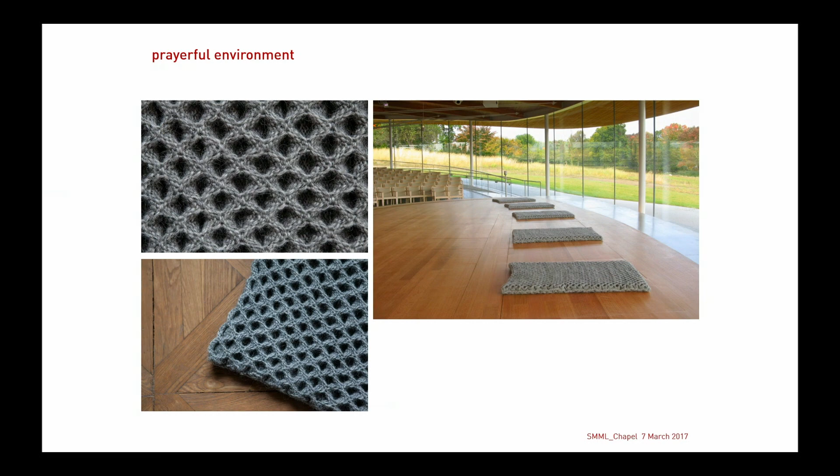The second prompt was about prayerful environment, and we showed some details of some prayer mats that his studio has worked on. We wrote: prayerful environments provide protective spaces that enable individuals to suspend their connection to the stresses, routines, or circumstances of a given moment, and to mentally and emotionally connect to something beyond themselves. There are many physical attributes of constructed environments that provide perceptual experiences that enable this important transition from distraction to prayer.

The third prompt was about healing spaces. And one of the other things that was unique about the RFP was that although the chapel was always at the heart of the project, it really was envisioned as a spiritual center that also included a reflection room, which is what you pass by to get here, and a Muslim prayer space, which we'll talk a bit about as well. All of those spaces were really at the heart of the mission of the hospital, that these were spaces that provided a kind of healing that went beyond what could be provided by medicine alone.

So we wrote: healing spaces provide respite from the challenges of illness and allow individuals to recover optimism in the process of healing. For many, a connection with the sights or sounds of nature provides a space for healing. For others, experiencing beauty and quiet can nurture processes of healing. We propose to establish a protected outdoor landscape space physically connected to the chapel, allowing individuals to move between the two spaces to seek their own personal experience that provides respite and nurtures healing.

And we'll talk a little bit about that garden, which is a future project that will happen outside these windows, hopefully soon. And the last is manipulation of light.

The manipulation of light will serve as the most critical consideration of the project. Our ideas related to natural light, generous and indirect, will drive the geometric development of the new chapel volume and roof structure. The manipulation of natural light will also play an important role in helping differentiate distinct areas of sacred space that comprise the chapel, including the tabernacle or space of ablution. Both material selection and landscape sequence can contribute to these effects and augment larger visual impacts with the subtleties of weather, wind, and other natural phenomena, and the movement of sun, clouds, or the changing colors of the seasons.

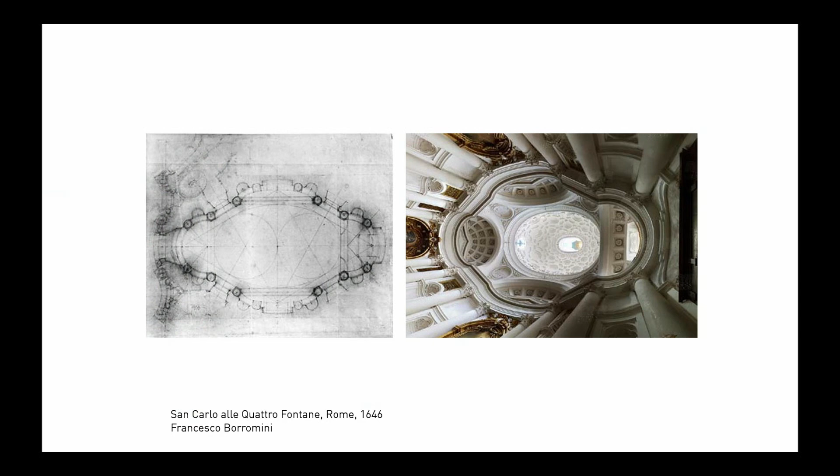So those were the first responses to the prompts before we really delved into the project design in particular. And then, so what we're showing you are actually slides directly from the interview that we had with them, after the first submission of the RFP.

And this was a slide that we showed — I think it's there now — the Borromini's San Carlo alle Quattro Fontane, as well as San Lorenzo in Turin by Guarino Guarini.

And we talked about these as the kind of role that geometry plays in the production of space and the importance of it. And part of what we were talking about too was the role of a particular moment in church architecture of the Baroque, where the architecture was really given the task of trying to produce a sense of awe, a sense of wonder.

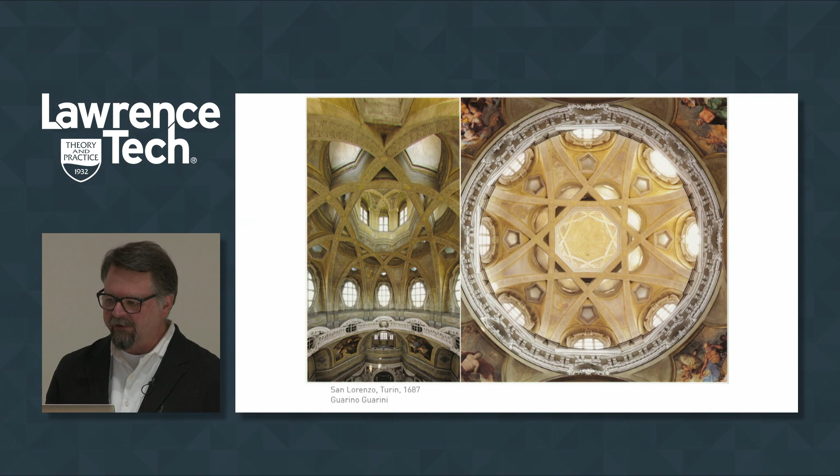And the architects who were working on that did so in pretty remarkable ways through the manipulation of sophisticated geometric systems, but also in ways that rendered things that were heavy as light. And particularly the Guarini that I think you're seeing on the screen right now is a massive dome, but it's rendered in a kind of lattice work that is pretty fascinating to us.

So we're trying to think about how the qualities of light and the shaping of a space articulate the potential of a new kind of volume. And part of this was in response — I think after we're done, we can all walk to the old chapel and you can get a sense of the significance of why we were talking about a spatial volume in relationship to the proposed project.

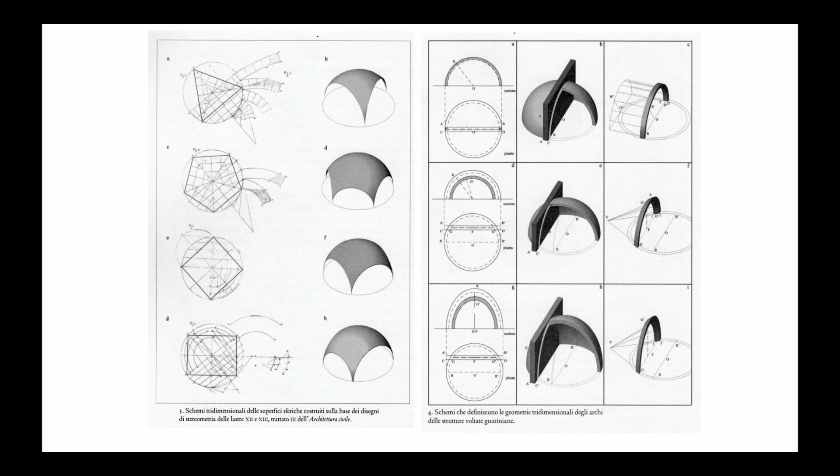I'll also say that at the beginning, the prompt was not necessarily to do a new chapel. The RFP said that the project was open to both renovating the existing chapel or possibly building a new chapel. So we were trying to calibrate our presentation relative to the possibility of renovation rather than just a new chapel.

And the other aspect of the work that we brought to the table when we were invited to interview was some research that we had already been engaged in related to dichroic glass, but in a very different context.

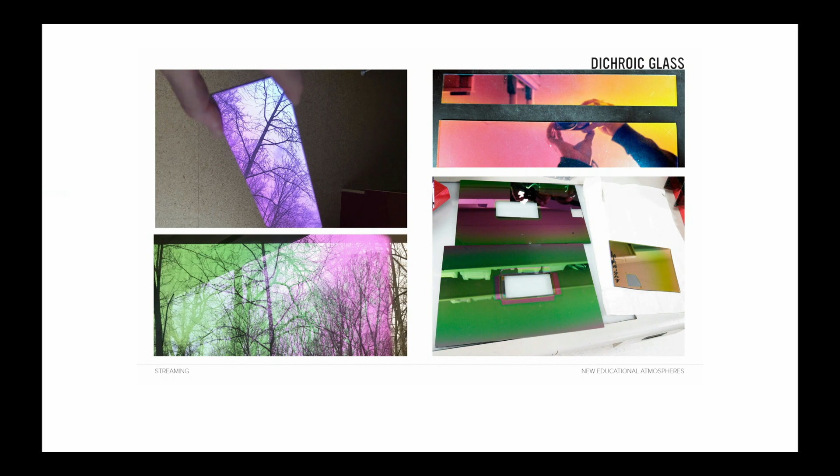So the images that I'll show in a moment are first a photograph from a series of samples that we received. We were working on a grant sponsored by Guardian Glass as part of work we were doing at the University of Michigan. In the process of proposing a project related to glass, we got a tour of their facilities, and the samples you'll see are part of a glass sputter coating process, a little bit different than this glass, which is a laminated glass with a film in it.

But one of the aspects of dichroic glass that we were really interested in was its capacity to be both reflective as well as transmissive for light.

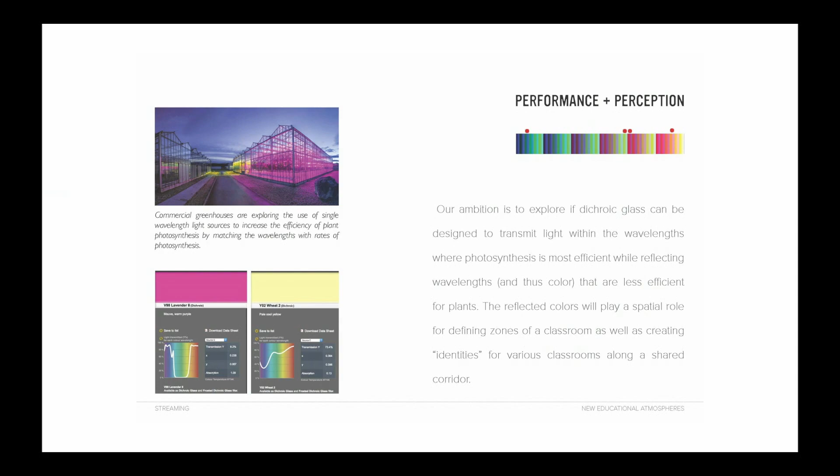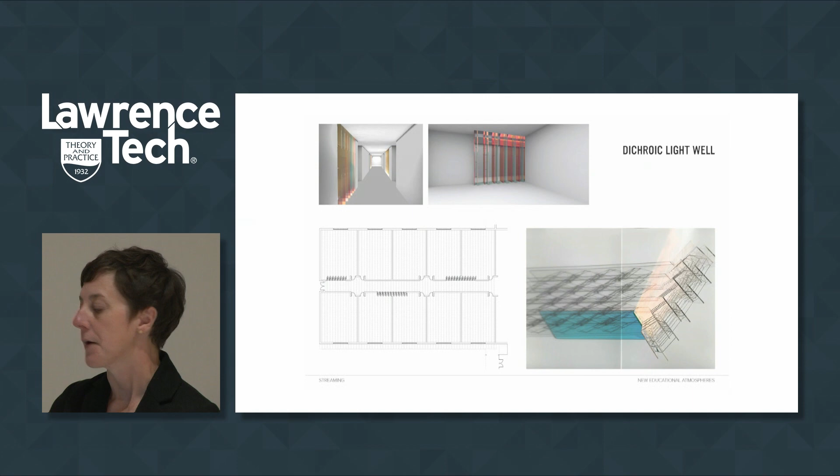In that research project, we looked at this material as a way to produce light well insertions in old elementary and public schools needing renovation, merging STEM education with growing plants through increased light and air ventilation. We learned that plants don't use the full visible spectrum of light, so we developed recipes with Guardian to split the light so some wavelengths transmit to the plants while others reflect into the hallways of the typical double-loaded corridor, managing heat gain and UV effects.

We showed this work and also noted there were exciting possibilities to reinterpret some of the qualities of color and light found in the tradition of stained glass in chapels.

So I'm watching Carl's screen spin.

They pushed us further than we might normally have gone. The first thing they asked us to do, before we even met with them, was to analyze the grounds of the hospital campus, which is enormous, and identify where we thought the chapel should be located.

There's the spot where we are right now, which we weren't really considering as a first approach. There's another spot on the far side of the hospital on Levan, where the old emergency room is, that was a potential location. We also talked about the existing chapel next door as a renovation site.

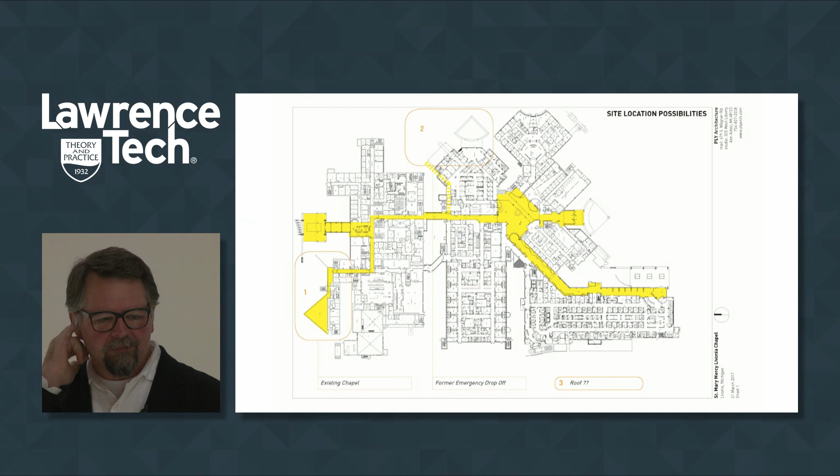That's where this site became the open space option. But there were quite a few utilities in this area which we thought might preclude the budget they had for developing here.

The final location we proposed, which no one remembered until we dug this slide back up—I met with the design team this morning on another room we're working on, and asked if anyone remembered we proposed putting this on the roof.

Steve Van Brussel, head of construction and our main consultant, said 'No, you didn't do that. I'm pretty sure you didn't do that.' But anyway, we actually did think about the roof, which is kind of crazy.

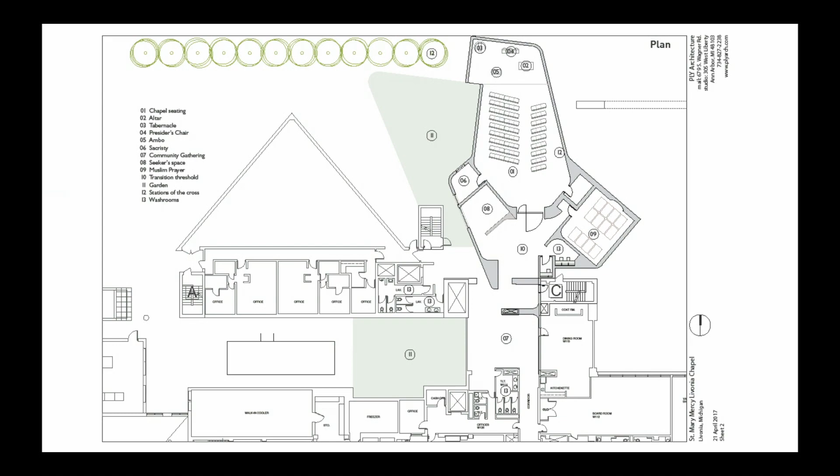So through the process, it looks like the slides are catching up. We did some test fits, which we won't show here, working on the existing chapel as a site and reorganizing it to work with the new program.

The existing chapel is a triangular figure with a bar of rooms on the back, where the priests' apartments are—two apartments where they live. But there was this additional program we were working through.

We tested shifting the volume over and quickly realized there were several advantages, one being a very special cross on the front face of the hospital located up behind and above us right now.

Thinking about the massing in relationship to that part of the hospital not only shortened the circulation sequence—you all walked past the cafeteria on your way here, one less hallway to go down—but it also captured the cross.

So we started talking about developing the massing as a way to borrow the cross and make it part of the chapel massing. That observation really locked in this site as the one to work on.

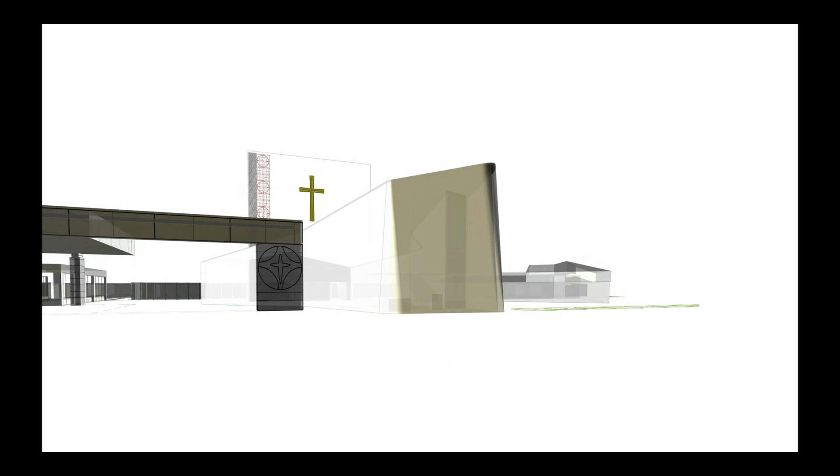As much as we were already interested in certain geometrical operations, we also had to deal with that cross and with the flying buttress of the porte cochere, which is only about 3 years old. When we suggested it might need to go away, we were immediately corrected.

There's a basement under the existing chapel, and the fire stair comes up right in this corner, which pinched us since we couldn't actually close that off.

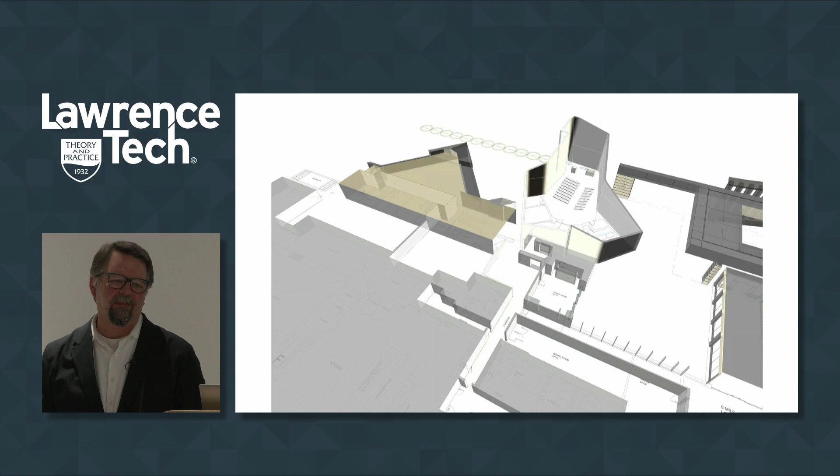We eventually ended up closing it for a short period of time, but it was a negotiation between all of these pieces that are pushing and pulling. Then there's the other geometrical constraint: we're in the grid of Michigan, but Mecca is 53.6 degrees that way, so the Muslim prayer space needed a reorientation and positioning on the site. All of these pieces were pushing and pulling against the geometry of the building, to the point where the shape started to form itself out of those maneuvers.

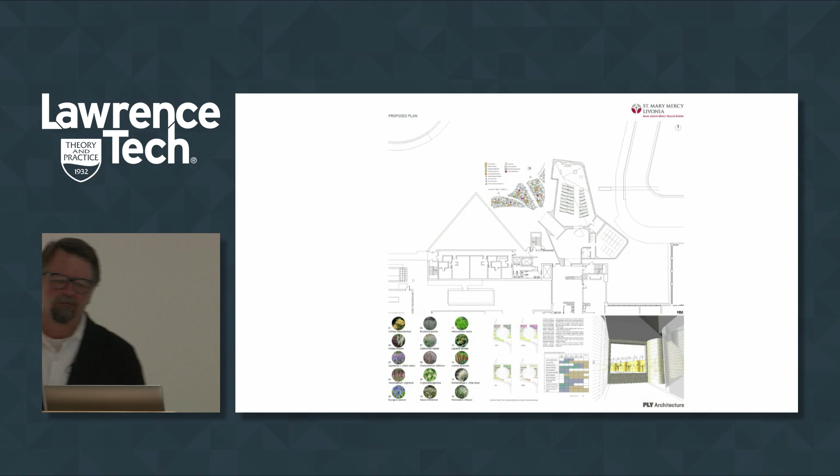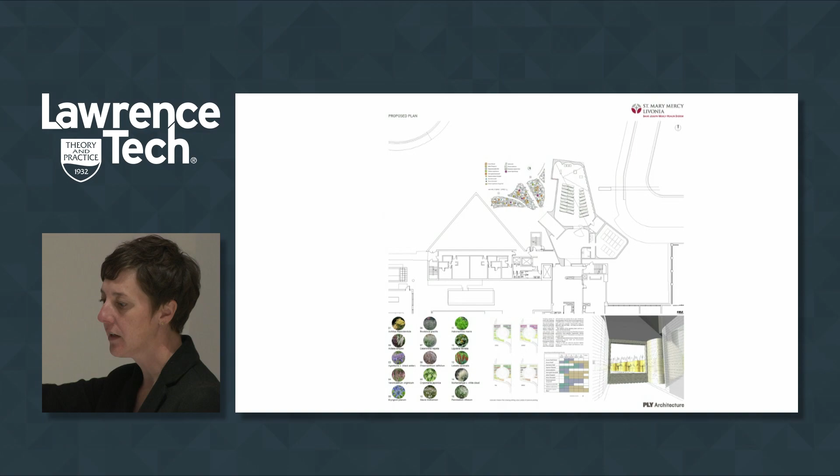The plan you're looking at now shows one of the early pre-schematic package plans, which has the seeker space oriented more to the west, which was to be a healing garden, and the Muslim prayer space down to the southeast, and the chapel very similar actually to where we are now. At that point, we had started to get on the inside.

It was a really rapid process, which was also one of the things that was really significant to the development of the work.

We had weekly meetings with the chapel design team, so every Monday morning we had to show up with the next step of development. There was a lot of pressure to get the project done because Sister Mary Modesta, one of the original nuns and the foundress of this hospital, was still very much involved, and they were originally aiming for a birthday November opening. Even with all of that, the start to end of construction was around 19 months.

This development was happening very quickly, so we were using representations like setting up tones in the digital model, not trying to do too many extra drawings, but just showing them the process work underway with tones and colors that could clarify what we were working on.

Some of the things I think you'll see are familiar. Some of these images show the development. We had three or four iterations of garden walls for the healing garden, all of which is on hold for the moment. But a lot of the qualities of this chapel space were there from the very beginning, even in rough forms, and a lot of it was about refining those as we got more specific about material systems and space constraints.

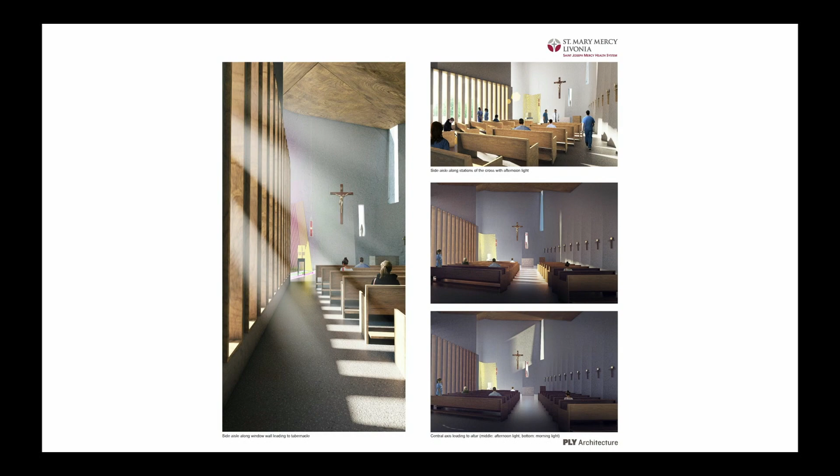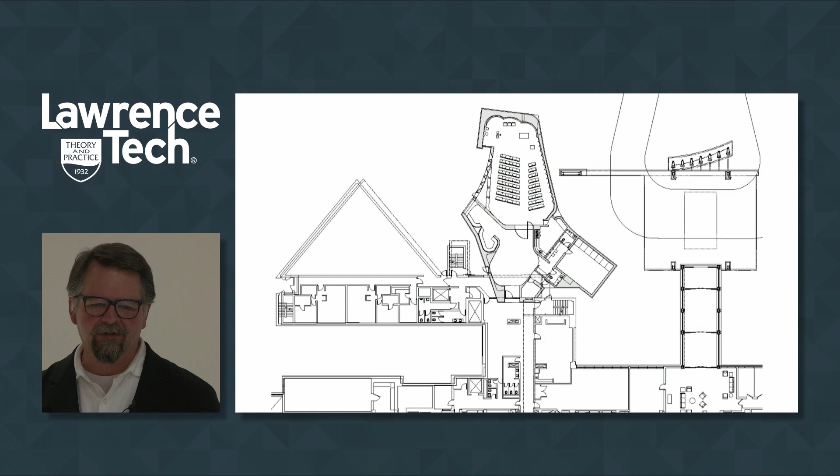The other thing that accelerated the timeline: at the beginning we were meeting every Monday with a full new presentation of the design. It was end of March, April, and we had another major deadline for a project in China that our whole office was consumed with, and our go-to students at school were grinding through their final reviews. So really the first 8 weeks of the project, Jen and I were still teaching full time, but really the only ones working on the project because we couldn't peel anybody else off the other work we'd already committed to. It was a kind of insane moment.

It's also why there's almost no renderings, because we've just never learned to do that. So we were inventing, within the time constraint, ways of presenting the work and showing it. Then we got to the point, right about the end of May, with a fairly fully developed schematic design.

A full package, I think, was about a 120-page submission of the schematic design package that was then handed over to the construction managers who were just hired at that point, and they did their first cost analysis. It was a really interesting process, I'll say.

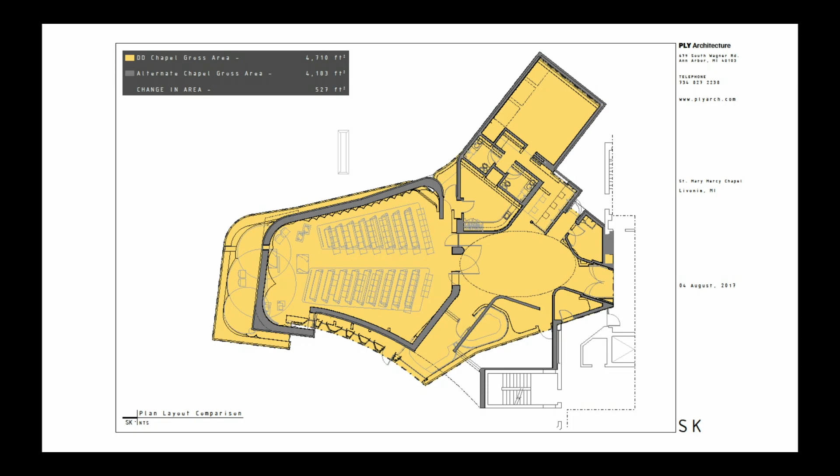They're using a software called CostX, which basically takes your BIM model and imports all the data from it to generate their cost estimate. Of course, we have a Rhino model, not a BIM model, and AutoCAD files, not.

So we did a lot to work through with them because they'd forgotten how to do actual takeoffs. They scanned a PDF of our drawing, dropped it into their software, and began to make a schematic model. They misscaled the drawing they imported to about 30% bigger than it was.

So we got the first numbers back from them, and it was absolutely wild and shocking for everyone. It ended up being over $1,500 a square foot, which, even for what we were drawing and what the hospital was interested in, was a bit radical.

The interesting thing in the process of working with builders is that that first number, no matter how wrong it is, is still there. It's still a kind of number that sticks.

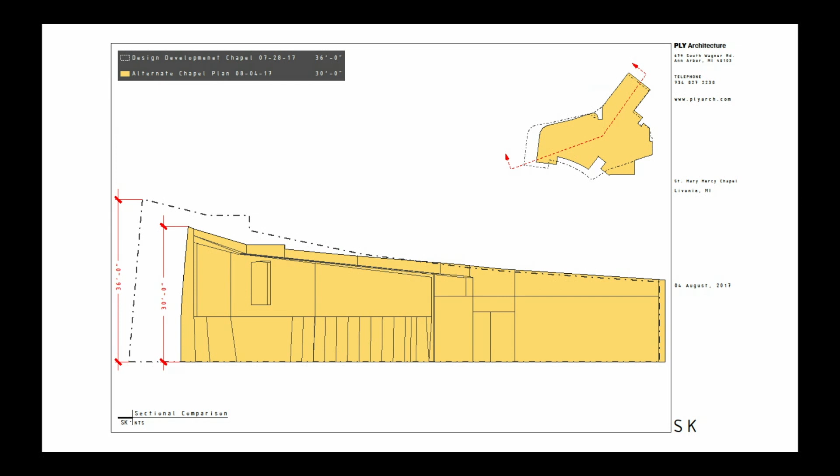As we were scaling back and making corrections and assumptions, you don't ever get all of that money back. So we were in this kind of 6 week period of battling and working to resolve the questions, anxious to move into the next phase where we're working with BIM, but we weren't quite there yet, and the design we had developed probably wasn't the one to learn it on, given the workflow and the accelerated schedule of the project.

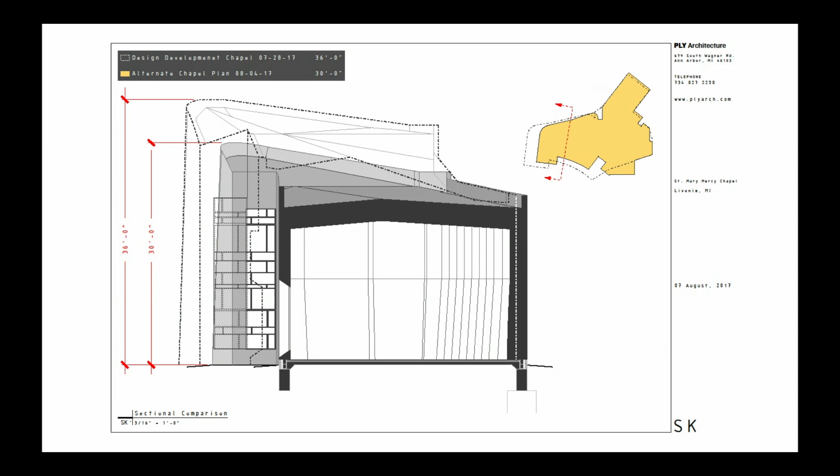So we were working in a pretty intense way back and forth with them. At the point where we got their numbers to the right square footages, we were still far enough over budget. The slides you're looking at now are us taking an old Xerox trick of shrinking and reducing the spaces without changing the overall qualities of spaces, to the point where we're still working to get that budget down.

And the last drawing here, that might be about to show up, is pretty close to the scheme you're seeing now in terms of the general location of pieces.

As part of that, the Muslim prayer space, which was independent and part of the new wing, became a renovated space down along the corridor. It was the nuns' dining room, their private dining room, which they gave over to the space. We designed an ablution space as a kind of entry sequence to set up that room.

And then we reoriented that, wrapping originally with a screen to be fabricated, now a combination of screen and curtain, to reorient the otherwise rectangular room, which is shown in yellow in the drawing you're looking at.

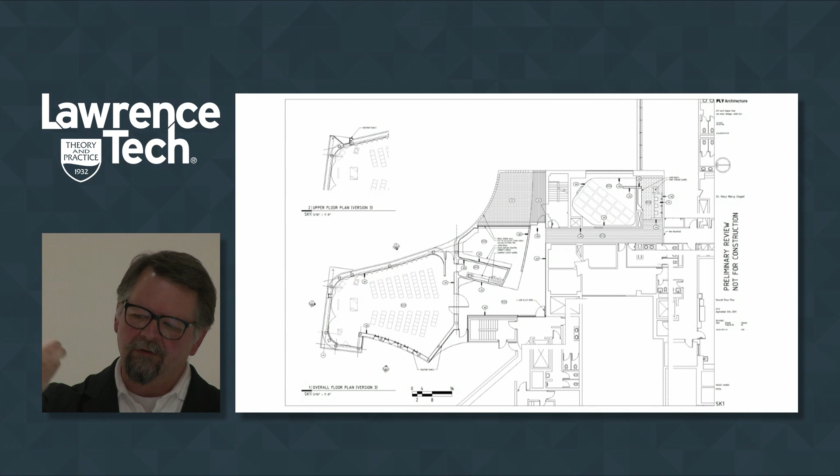And then the other thing that immediately happens when the project goes over budget is they cut the garden. Landscape is like the first number that's attacked. There was a lot of sentiment to maintain that relationship between inside and outside, so it became the courtyard adjacent to the reflection space around the corner.

So we just flipped through a few of the iterations of the plan. The yellow one was leading up to schematic. The black and white was our SD, and now you'll see one that starts to have the tone and recognizable pews that you're all sitting in, and that's the current plan as we have it now.

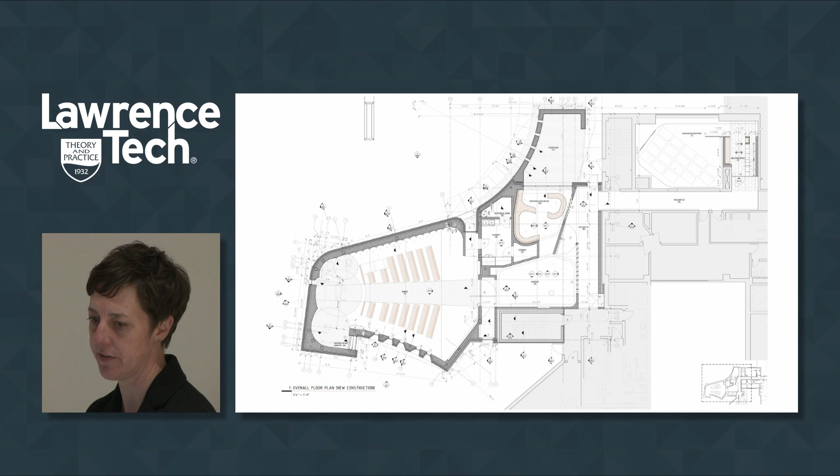The other big part of the development was the corner, the expressive corner of the building and of the chapel. The massing of this project, while the individual rooms were shifting, had always stayed pretty consistent, in the way Craig described as smoothing over disparate uses and trying to make the beacon the singular element out of that.

And so the transition of the corner from square to rounded at the top was there from very early on, although at the point of SD we were still testing out various ideas of what material we might use to actually achieve that.

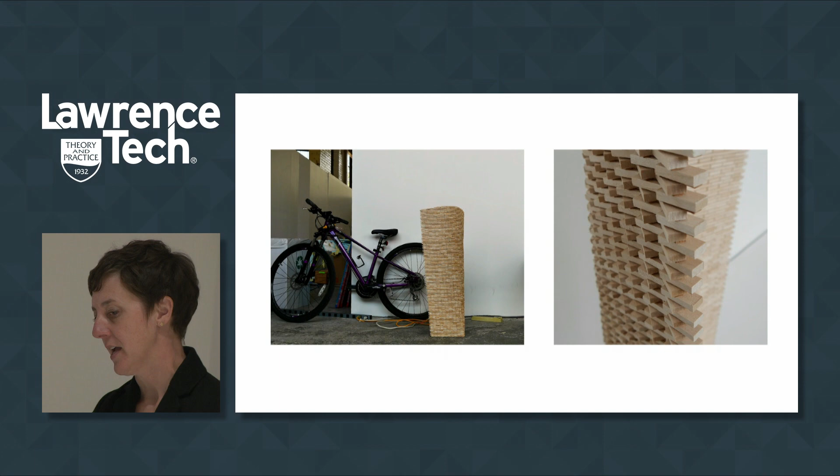Yeah, we did. We're not showing these, but we did a scheme with precast concrete.

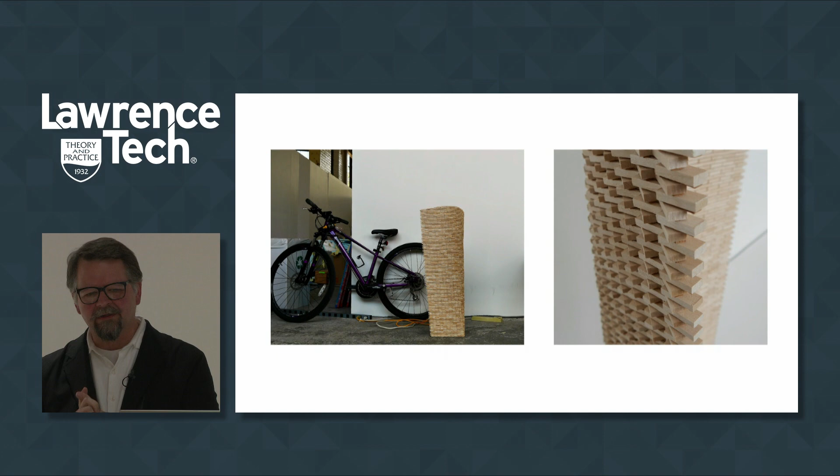It was determined by our construction managers that all of the precast concrete companies were so backed up because of the Little Caesars Arena that we couldn't get on anyone's list, so that went away. We looked at GFRC as a series of cast panels at a different scale than the precast. That kind of got lost along the way somewhere, and then ultimately we settled on brick as a way to begin to work.

A couple of ways we began to work between the digital model and a way of beginning to design the brick and think about the distortions in the geometry, which were there from early on, and were interestingly fought for by the design committee. For them, the curvature of the wall or the curvature of the base of the chapel made it stand apart from the existing rectilinear box of the building.

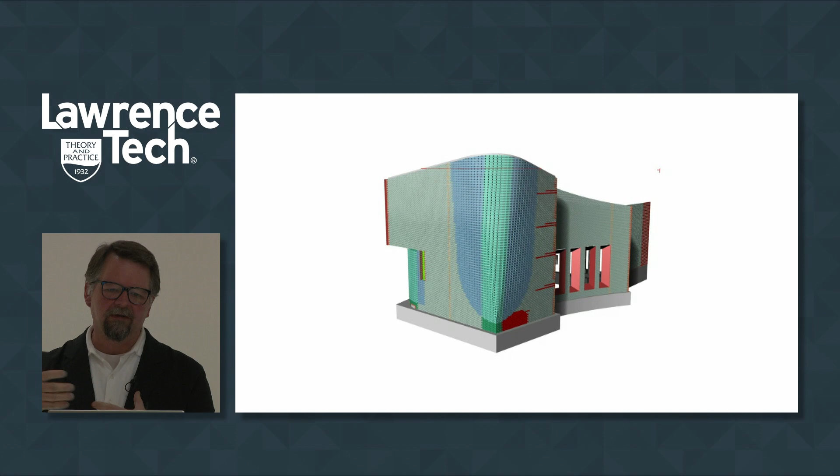They really didn't want this chapel to blend in with the existing building, even though we were trying to work contextually and borrow the cross and develop it. They wanted, and we wanted, it to be a kind of unique figure.

And so the corner, this important corner, is basically that corner. And it's the position of the tabernacle in the plan. And the interesting thing, and we'll talk about this again when discussing the ceiling, is that there's a tension between this space as a church. It's not a church, it's a chapel.

It's designed for people to just come in at any time. There's a mass once a day, at 6 a.m. And the tabernacle, which is where the Eucharist is held, is used throughout the day by lay ministers who are taking the Eucharist to the sick who can't come down to the chapel for Mass.

So for the nuns, that becomes more important than the altar, which is the site of the ritual of the Mass. The tension between these two things sets up an interesting relationship in here. So we wanted that verticality and height to grab there, and it also gave us the opportunity to grab a little piece of southern light by pulling that corner further over to give us the dichroic window.

But developing that corner, and we'll talk about the outside of it, was a tricky process both in the geometry, but also a really incredible and awesome experience of working with a group of unbelievably talented masons who were in it from day one. They saw the design and completely wanted this job. They competitively bid it. It was a pretty great thing to get them on board.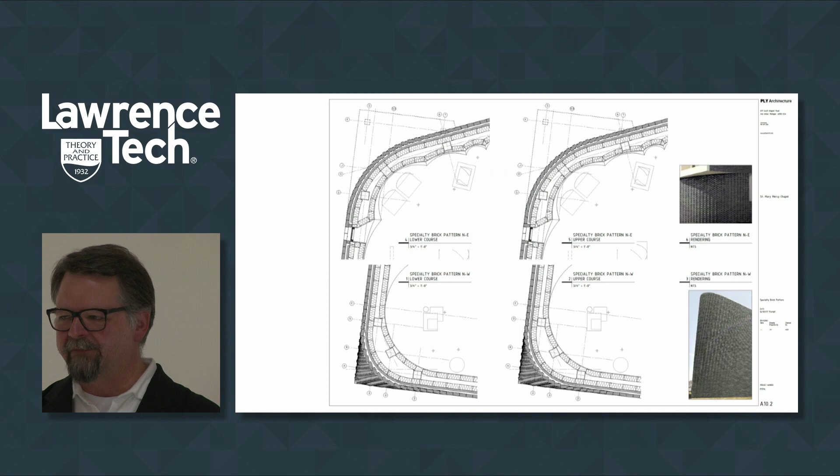It was this great moment where you see the difficulty of what it's going to be, and then you see the moment that's a challenge, and craftsmen taking that on as a way forward.

And so we developed the drawings through a back and forth dialogue with them about what we were after. As we're wrapping the brick around the corner, it's conical, so every course of brick is a different length if you stretch the rows out, because it goes from the right angle to a soft curve at the top. So every single course is different, and it all resolves at a straight line back here and a straight line up at the top of this window.

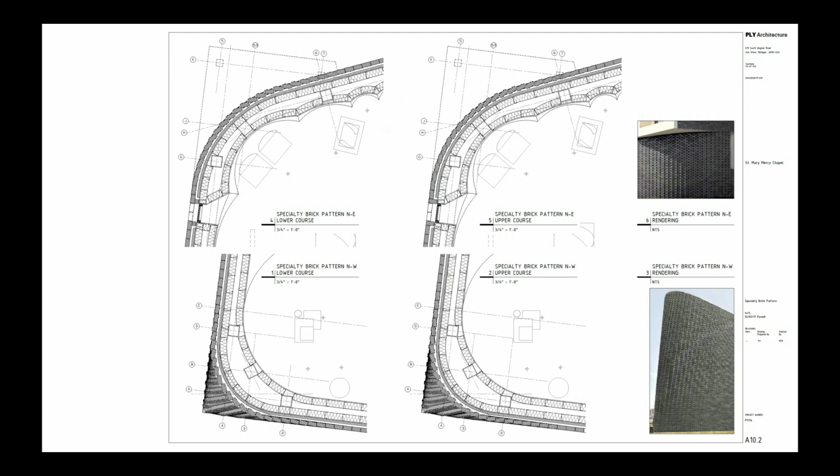And the decision was we don't want to cut any bricks at those moments, because we'll end up with some little slivers or some big fat joints. So there's a whole process we went through with them, both in developing a grasshopper model that populated the wall of brick for us and worked on the angles, and then going in and massaging specific areas where we're expanding the mortar joint a little to nudge it, or tightening the joint a little to shrink it, to get the final resolution point in line.

It was a really remarkable moment because the digital got us to a certain point, but it wouldn't get us to that last hurdle. We had to go back in and begin to develop by hand through the constraints and issues we were putting on it.

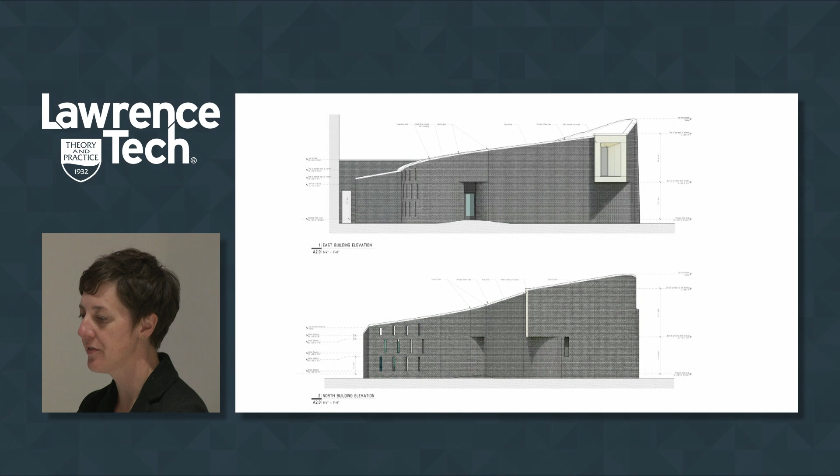The digital corner studies you saw early on, the color coding has to do with that. It has to do with coding the rotation of the bricks, and also coding the different spacing layers of the joints of the brick.

The digital model was one of the things we used to communicate back and forth with Davenport. We shared a model with them, they rebuilt their own digital model and shared it with us, and there was some comparison and overlap to see if everybody was using similar logics to build that corner.

The basic premise we brought to the development of this corner and the patterning of the brick was to simply let the brick happen. So as it turns the corner, we just said we'll delay the rotation of the brick just slightly.

It's starting to pop out a little bit as it goes around the corner in sawtooth. Then in the next course, we'd do that in the opposite direction, so the brick starts to make a kind of brick weave in the pattern, but it's there just as a result of the geometry interacting with the brick itself.

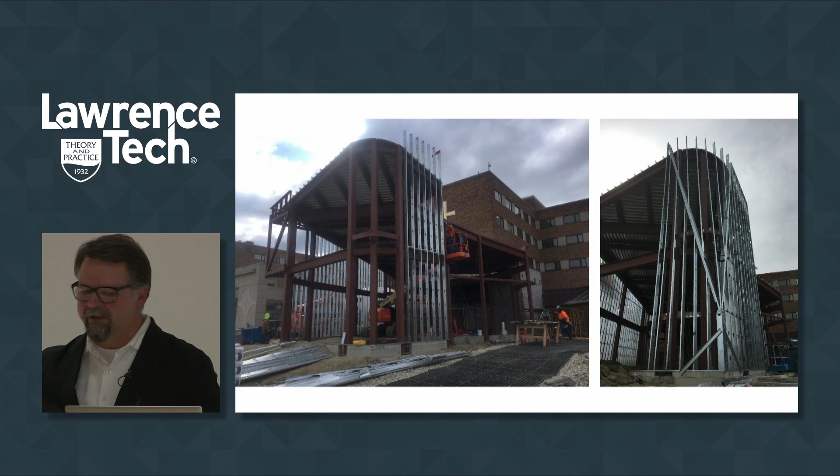That was important for us because we wanted to articulate it as a presence on the facade, given how few windows there are, since it's such an internally oriented space, the hospital chapel as an inside, with only a couple windows looking to the garden, the dichroic window, and a window to the east that in the morning mass brings light down onto the altar. The wall itself needed to have a presence and character that was important.

One of the more challenging aspects of the corner had to do with the framing and structure of the corner, not just the steel structure underneath, but the secondary layer of studs to form the basis from which the masons would work, because there's also a tilt to it. So measuring where you are in space on that corner becomes quite a challenge.

There was also a lot of back and forth in terms of us sharing our models with the structural and steel engineers, and them sharing back. What you'll see in a moment is a layering of those two models together, so we could see overlaps and see where things were or weren't lining up, in order to coordinate that with the models the masons were working on.

There are three drawings in that image. One is the Rhino model of our project. There's a model imported from the steel fabricator, Douglas, who are just outside of Lansing, and then there's a CAD drawing of our wall section, all matching up to make sure there's precision and alignment of all those pieces.

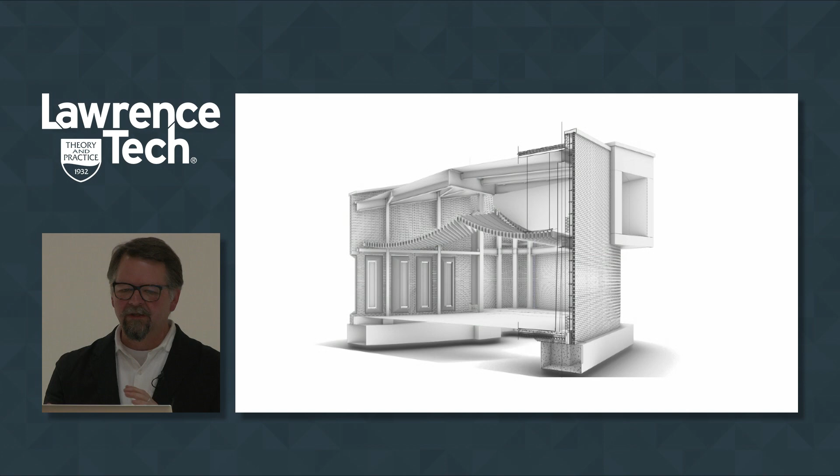The last thing we wanted to do was get that frame up and start bricking, and find that piece of steel is a little bit too far out, and now we've got a whole other thing to worry about. This image is our skin and shell model with the steel model produced by Douglas inserted inside it, so we were looking to begin measuring conflicts within the resolution of these two pieces.

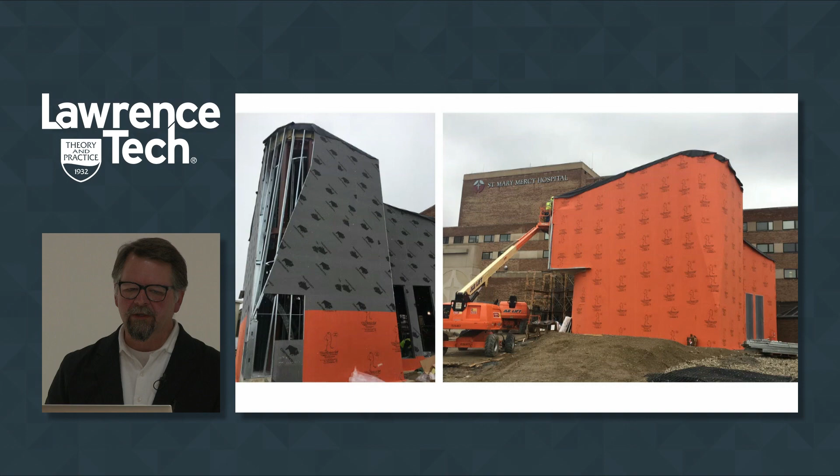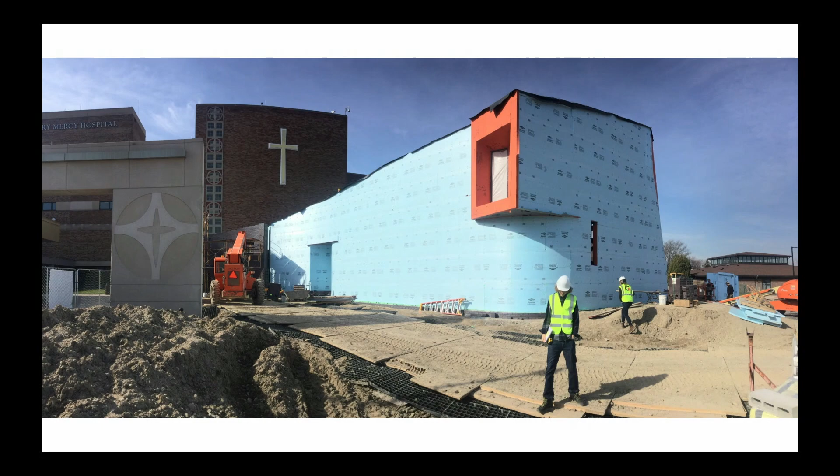Now you're starting to see a sequence of images, which we'll let play a bit. This is the construction of that corner, from the steel frame to the steel studs, which make the larger surface as a ruled surface wrapping that corner, to the waterproofing and sheathing, to the insulation, and then you'll start to see some of the brickwork going into place.

You'll get there in a second. We did a few quickly.

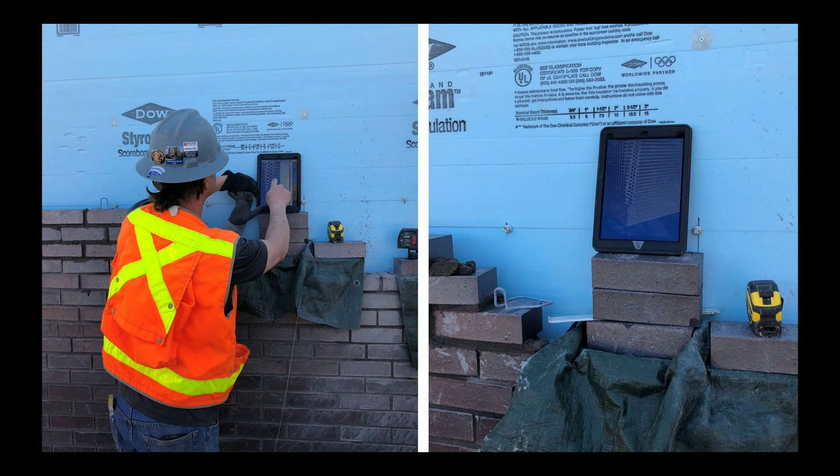The brickwork was another amazing thing about working with Davenport's. We were ready to print full-scale plotted templates of some of the brick coursing, and at one point thought they'd cut plywood molds every fifth or sixth course, then reconcile in between. In the end, Mike felt like they could just do it.

So what he developed was a method of running vertical strings that grab the point of each rotating brick. The masons are still placing by hand, working in a way that's calibrated and careful, but giving themselves a really interesting set of line work that they're beginning to develop.

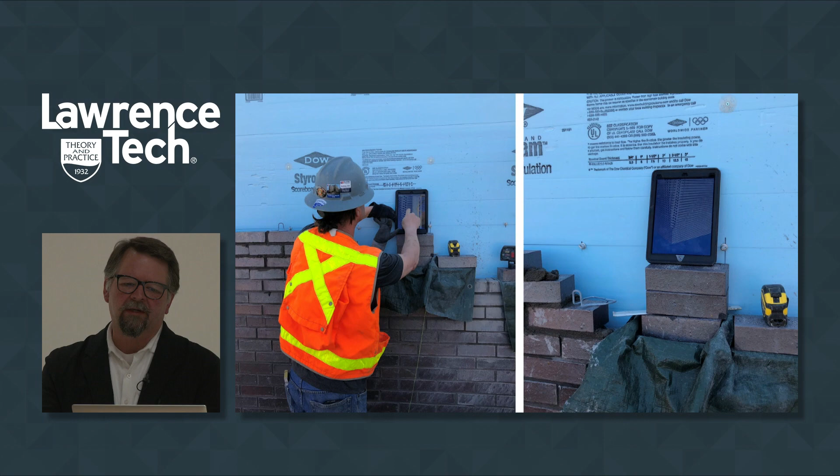When we got to the larger corner, we had a Rhino model we developed that they could import onto their iPads, turning on every layer of coursing. They were basically building the Rhino model one layer at a time as they went up, checking and working on it. You're seeing an image of Mike with the iPad on site.

And then the corner is really interesting. On this part of the building under the window, those vertical strings are simply straight. But when it gets to the conical corner, the joints and points of the brick start wrapping around, so every day he'd reset his strings.

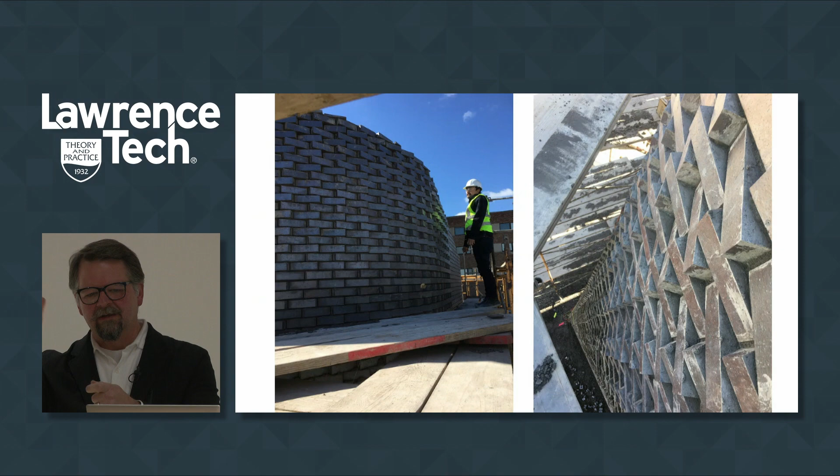Mapping that corner around, they did a pretty amazing job, but the other challenge is that a lot of it comes down to direct visual impact. It was frustrating for both them and us because we couldn't see it during the process since they'd built a scaffold up along it.

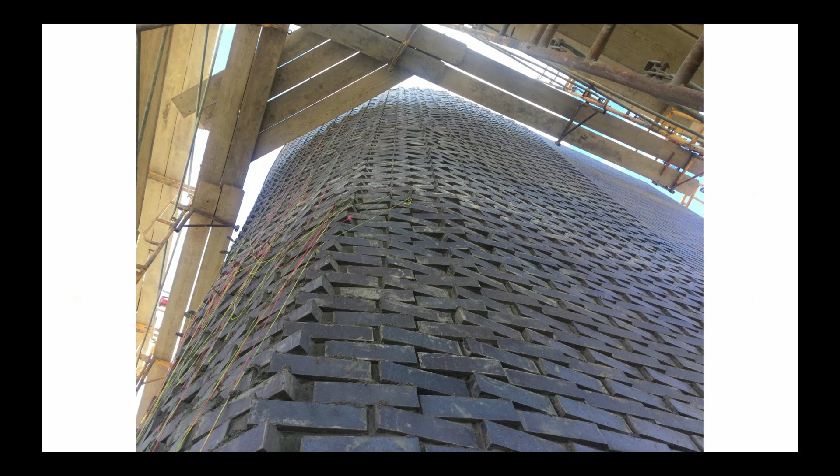We kept getting small glimpses and noticing points where it was a little too flat, like the strings weren't quite right, flattening out too quickly, or a little too peaked in places. Mike was just like, go away, get out of here, we'll fix it. We'll come back and fix it, but we need to get to the top, then pull the scaffold off, see it, and come back to make adjustments.

And they did, it was totally amazing. We sat out there. Taka was there every day while they did this corner, showing up on site while they worked through it. We thought they'd let Taka lay a few bricks, but in the end they never did. Still, I think Taka really became a kind of mason through the project.

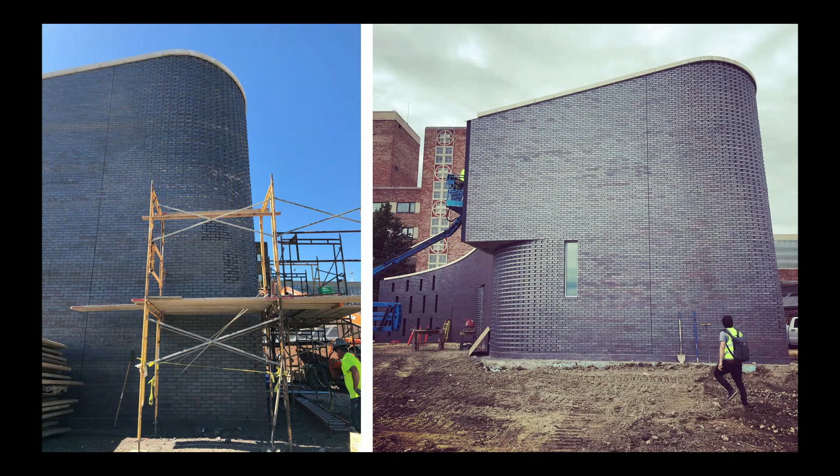That corner pulls off what we were after: it starts to produce a kind of visual density right as it rounds and models. Coupled with the lower and upper corners, it makes this interesting dynamic across the facade that we were after.

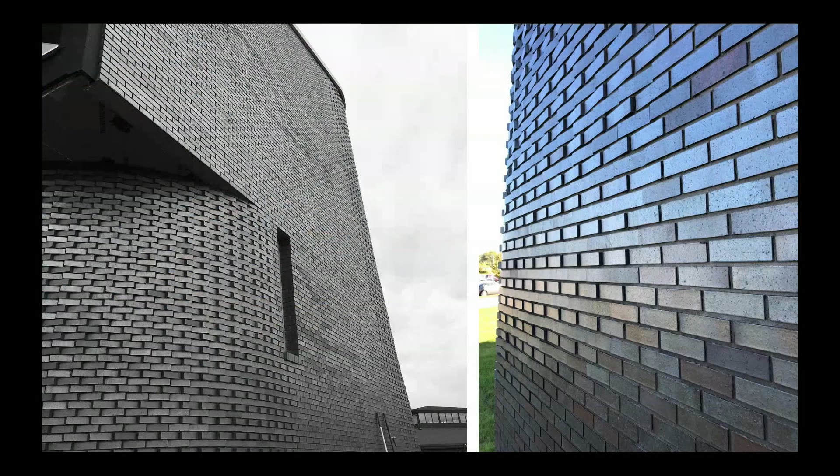You're seeing images of the final brickwork as it's finishing in process. The other nice thing is it takes advantage of the iron spot brick, in that every angle of the brick grabs a slightly different angle of sunlight or reflection. So over any moment the surface is changing in color and reflectivity, producing some of the atmospheric qualities we were after.

Is everybody stuck right now, or are some cycling through? Okay, that's cool, you guys are ahead of Carl.

They put some scaffolding back up, took out a couple of big sections, and redid it within it. We were freaking out when we started to see that crease in the corner emerge, with a little flat spot, and we were like, they're way past it already before we caught it. But they fixed it, they were amazing.

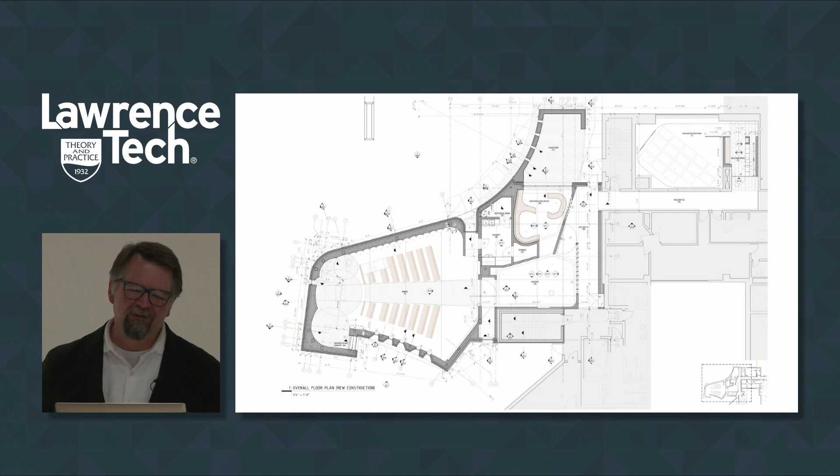So we're going to take you to the inside from the outside, and recalibrate through a diagram we started thinking about earlier in the schematic orientation and redevelopment of the plans. We started thinking about how different religions organize space and orientation. In the chapel, there's a very strong axis and everybody's oriented along it. In the Muslim prayer space, it's more of a field of people oriented to one particular angle.

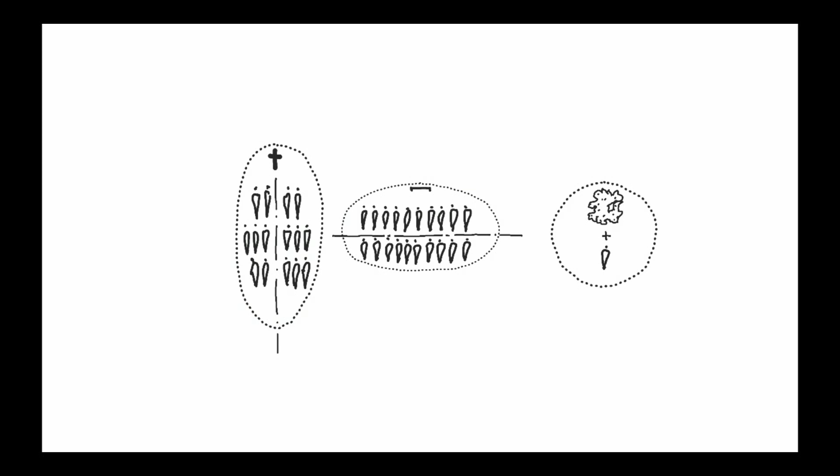We were also asked to deal with this reflection room, which is what people are calling it now. For a while, a number of the nuns were thinking of it as a seeker space, for folks who maybe were in the Catholic faith and are no longer, or aren't sure yet. So we wanted to identify its relationship in terms of orientation to something. We conceptualized that space as a circle, that somebody would be in relationship to that garden Craig mentioned before, or a tree or nature.

The section that's coming up shows a cut through the chapel that we are in now, a bit of the seeker space just behind us. I'm going to show very briefly those other two spaces, which we'll try to save enough time to visit. The Muslim prayer space is the one that probably changed the most through the process.

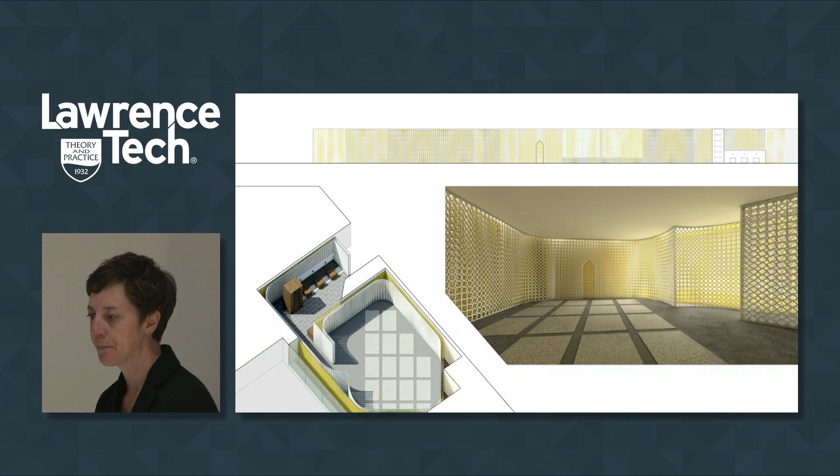That's both because of its relocation, but also simplification in some of the screening elements. The ablution space is very much in line with where we started, and it got the most investment in materials and detailing, because it's the space of transition from one place, from working or being at the hospital, into the space of prayer. By the time you're in the prayer space itself, you're less focused on the room than you are focused on the act of prayer.

The image I'm showing originally was a kind of screen, a double layer of laser cut metal that was interpreting and extending some Islamic tiling patterns, with a gold layer behind and a white layer in front, with the cut out as the Qibla wall. That center part is still intact in the room. The rest of it transitioned into fabric, into curtains, in order to reorient that room.

The seeker space always had an idea about shifting from the iron spot brick on the outside to something much more colorful and reflective, maybe more interior oriented, on the inside. So we found a glazed brick that had a bluish green tone to it, which really had a lot of resonance to people when we were showing them. A lot of different people from different faiths found that as a kind of reflective color. It just really resonated with people quickly.

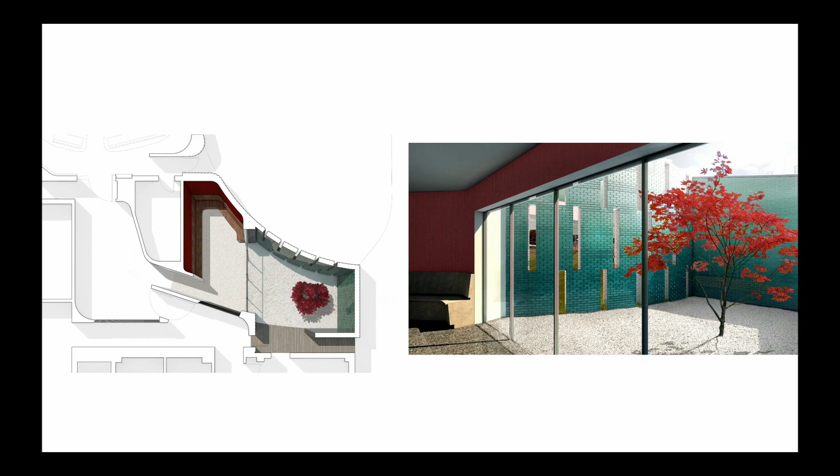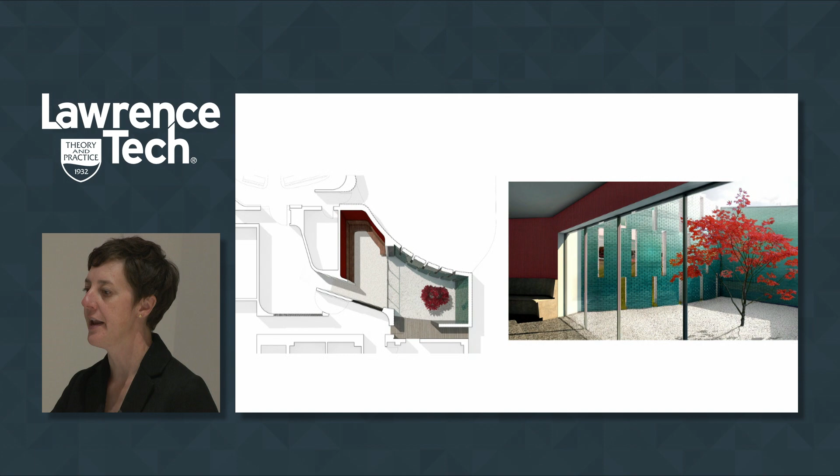A lot of the development of that room had to do with the development of colors and geometries, one to the next. The image is an older version of it that also went through a lot of different versions. The current format, which you'll see - this is before the outside of the chapel changed. When it shifted, it gave us an opportunity to get the bench spaces much more in a circular relationship with that courtyard, so it has a stronger visual relationship now than it did earlier on.

There are two small things you'll notice when we go back outside and start to walk around a bit. There's a window into that space from the hallway, and it has a series of wooden louvers that allow you, as you're coming down the hallway moving in this direction, to see through the space into the courtyard, but it shields from view anyone who might be sitting in that space.

Aside from it being a kind of seeker space, it was also described as a place where a priest or a doctor or hospital staff might be consoling a family specifically, delivering news, talking over options. So it had to be a kind of protected and shielded space, but we also wanted to pull that light in all the way through to the hallway. The window opposite us right now, facing the hallway as well, is really to protect the sound, since there's part of the education wing of the hospital that happens in the basement of the old chapel, and there's always a kind of run of traffic across there.

Those wooden slats are actually all aiming your view right to the altar, right through. They're much more subtle because they're almost straight on, but there's a kind of subtle shift that moves across. And then the glass is also repositioning in between those, and it actually cuts down on some of the reflectivity of seeing yourself as you walk through.

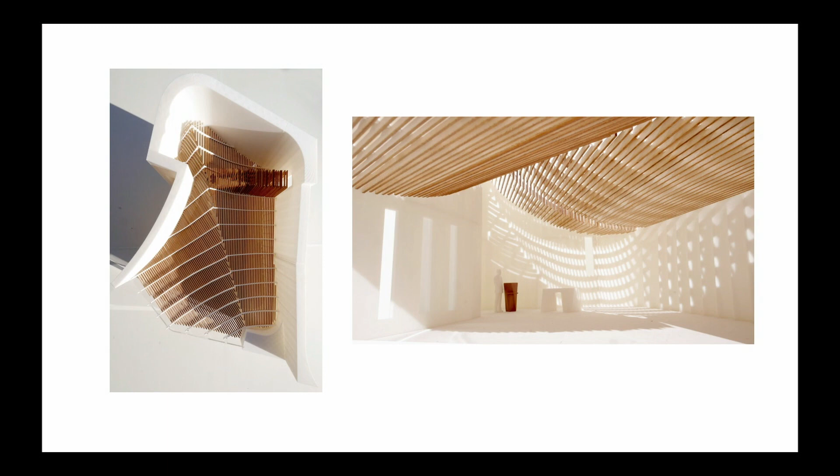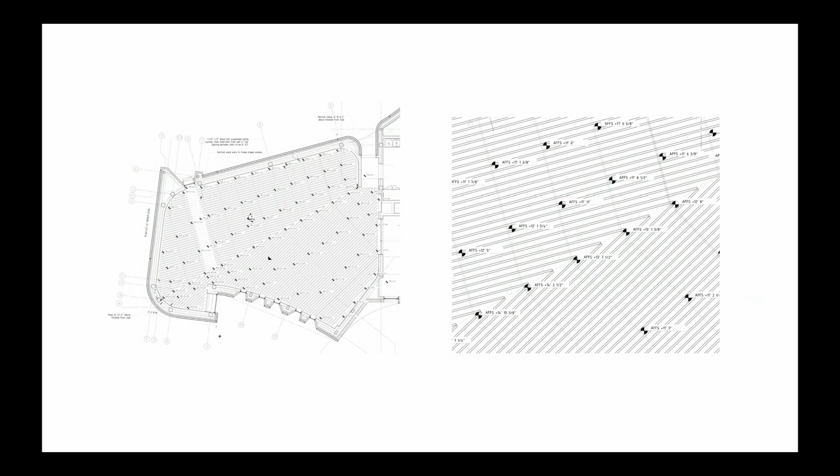There's also a kind of program of sculpting that happens, both the sculpting of the ceiling and of the walls, from the niches that define the Stations of the Cross, to the geometries inscribed on the floor that define each of the main liturgical spaces at the front—the speaker space, the presider's chairs, the altar, and the tabernacle itself. Those get inscribed in the surface of the floor.

The wall resolves between a regular geometry as it has to come together with the ceiling, sculpting that space in between. These are all also developed out of a ruled surface, actually made by a company in Michigan that has figured out a top-secret patented method of curving drywall, which they won't explain.

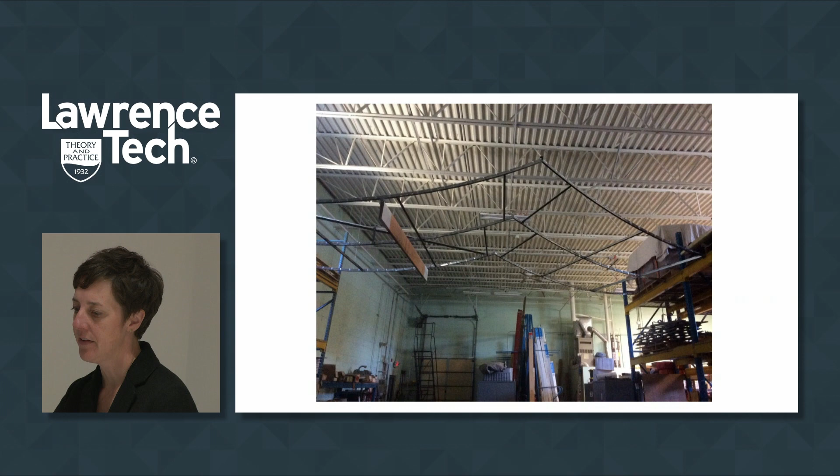He did it. So the images you saw were a study model we did. That was a very important model for getting the actual ceiling fabricators on board with the project, and also for understanding what we were trying to do, which is very difficult to show in any 2D or even 3D models. The final image of the ceiling is the test bending of the framework to establish those curvatures and geometries at the fabricator's shop.

Jasmine Construction did the installation of the ceiling, and they built the ceiling in their shop before they brought it here. It was a pretty incredible thing.

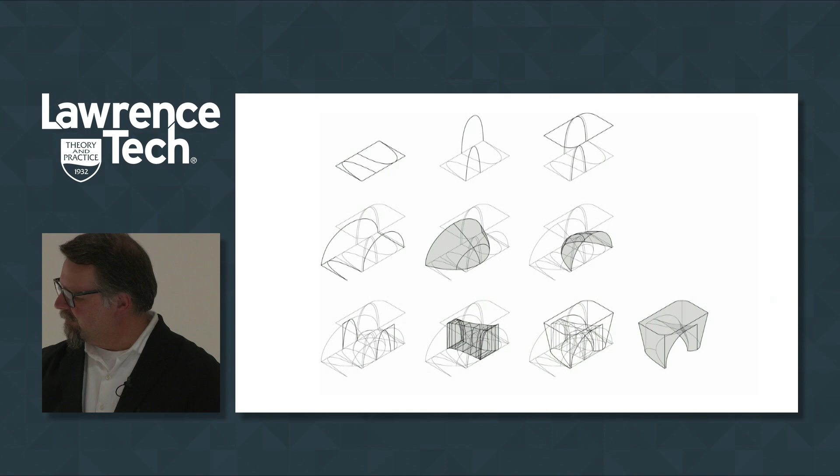A couple of other special pieces inside here—one is the altar. When we got the project, we were also given the Roman Missal defining the elements of the church that had to be met, and one of them is that the altar should be of stone. Although there's a footnoted exception that in North America it could be of wood, we decided not to read it—we never read the footnotes, we just read the body of the text. So we said, well, let's make it out of stone.

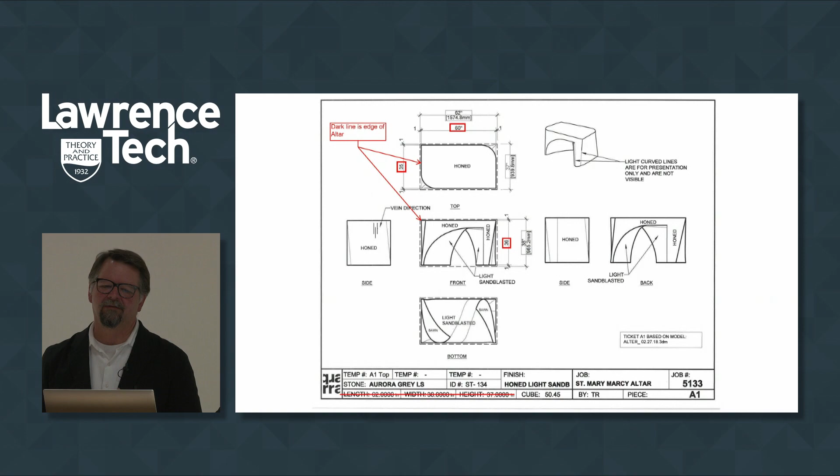We did a number of sketches trying to work off the geometry of the church we'd already established—the conical corner, where lines always go from right angles to curvature as they move in section. The altar really began to play that out as a series of operations we generated digitally, and then enlisted the expert help of Quarra Stone, who are totally amazing. We thought we were going to build this up out of a bunch of pieces, assembled in space, and they said, we'll do that out of one piece—that's so easy.

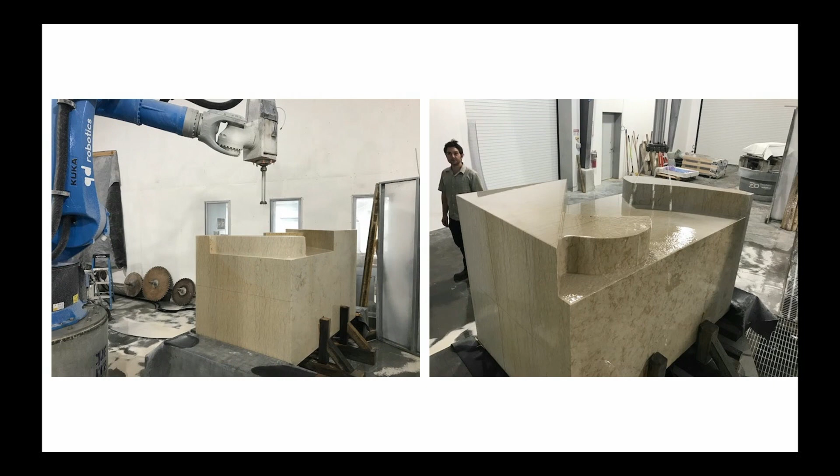We walked carefully along the edge of the water to get to the site of the stone and select things there. One of the members from the hospital design committee came on that trip as well, to help approve the slabs that were selected for the carving.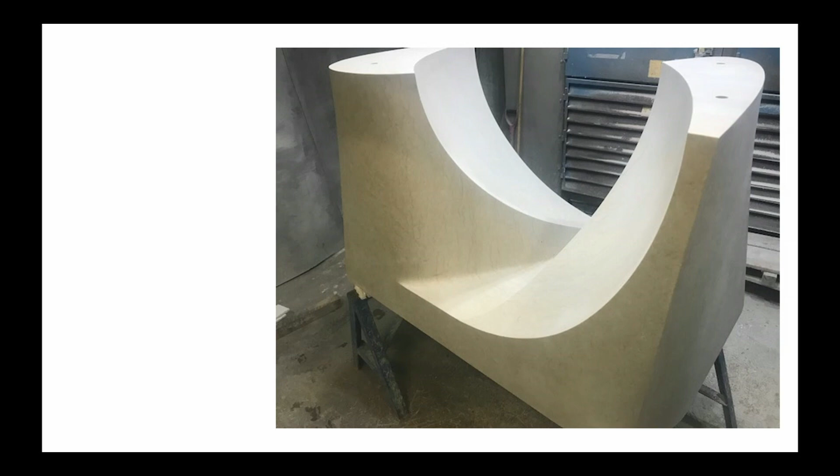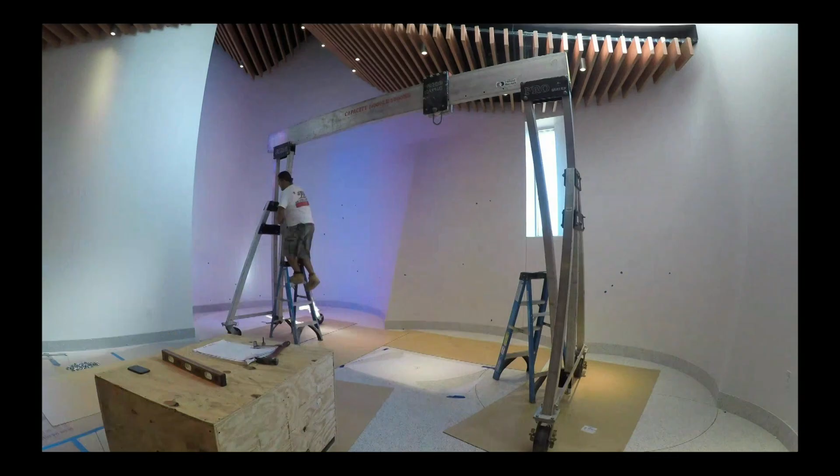The images coming up are some in-process shots. You'll see that the altar was carved upside down, carving out the belly of the altar. One of the things that was really amazing at Quarra Stone is that while they've got amazing robotic facilities, they also have master stone craftsmen, and all of these pieces are hybrids between that—they go through both processes. These are not just digital outcomes but really require the expertise of people who work with stone by hand to get the final finishes.

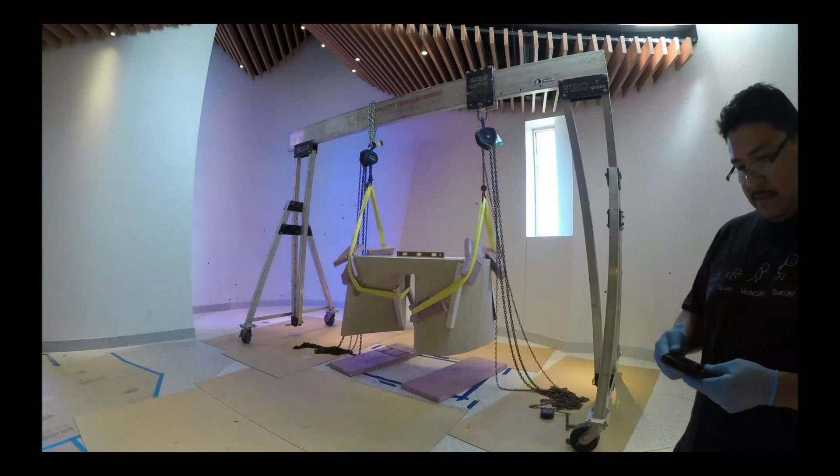I don't know if this will work, but we're going to try to show a video of Quarra setting the altar. It looks like it's running—really blows the bandwidth with these videos, but so far so good.

We had dinner with these guys at the end of the day, and hearing about the knowledge of placing the foam pieces, the soft pieces, so as not to blow out any of the beautifully sharp edges, was a real skill too. It wasn't just the fabricators and the stone craftsmen, but the folks who got these here and set them who were all incredibly knowledgeable about stone and how to work with it.

Once Jen went out and did the stone selection, and once the stone was in process with fabrication going, I took the office out for an all-day lunch and learn, and we saw the pieces in progress. One of the things that had happened is the original cutting of this piece—the bit on the robot exploded, and it jumped and knocked a huge corner off of it.

This is actually the second one, and the first one became a kind of test piece. The tooling on it was really beautiful, particularly at the edges—afterwards, come up and take a look. But we decided that in the final one, we'd even leave the tooling on the edge of the curve where it starts to come in, and not finish in any fine way the interior of the ambo, so you can see the stepping of the tooling. The curvature becomes something where we thought anyone standing there would have the tendency to want to grab hold of something, and you'd feel the tooling right at that moment, then the smooth on this side.

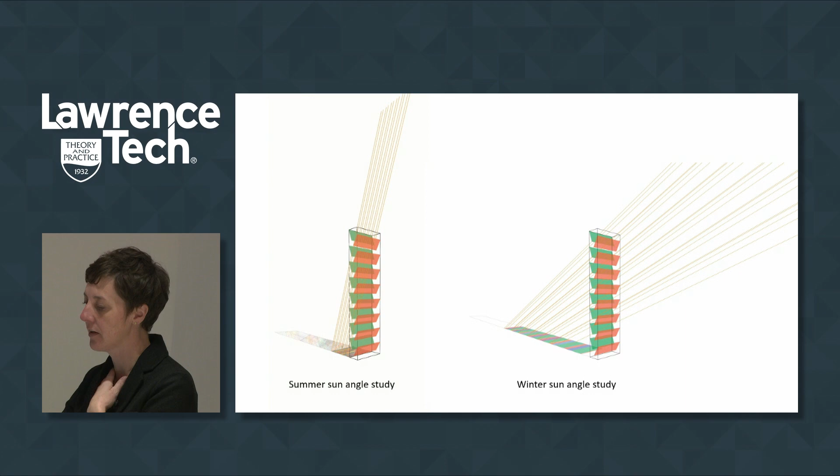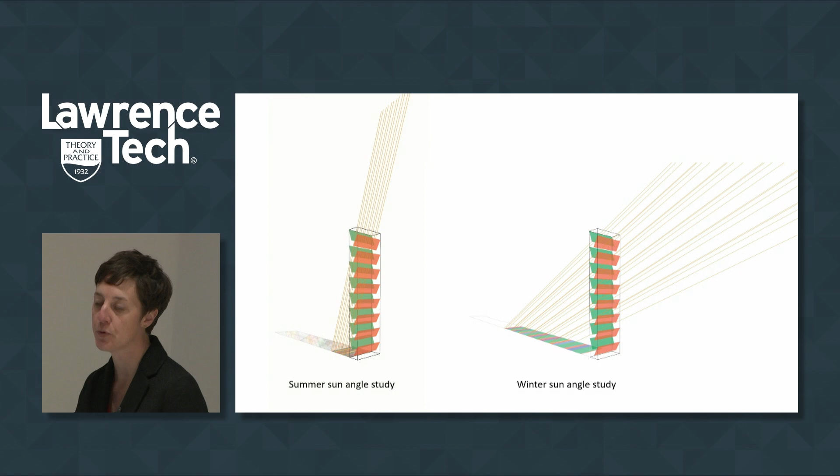So what we did is we went old school and drew sections and sun angles for the summer and the winter, and started working on the angles of the different pieces of the two colors. In the diagram, one of the two is represented in orange and the other in a kind of green tone. The goal was to orient them relative to each other and at angles such that in both summer and winter there would be sun penetrating both a combination of the two colors as well as both colors independently, to try to produce more color out of the two films available.

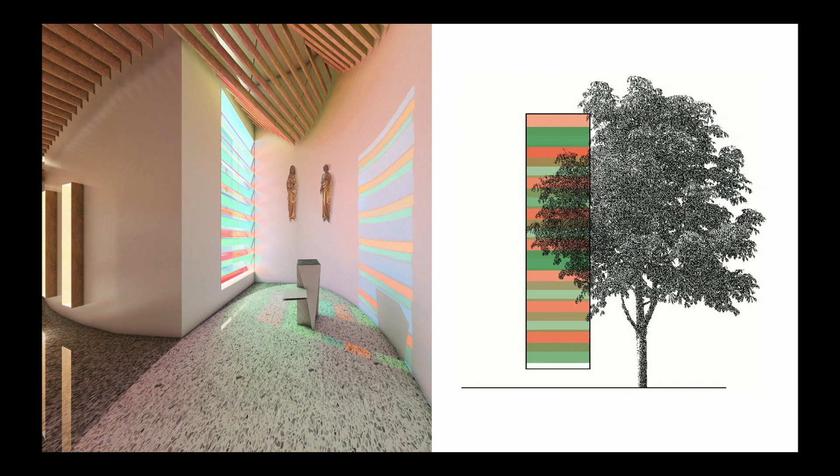This was a really challenging thing to represent or even know how to study, because it's so reliant on sunlight to really see those qualities. We struggled with it for a while trying to render it or show it in 2D, but it's really at its most spectacular when you can see it in person. In the process of fundraising, they asked for drawings and renderings, and there was just no way—so we sent the renderings with some samples so people could hold them and understand what the capacity might be, which worked really well.

It ended up that a nurses' group sponsored this in honor of a colleague of theirs who passed away during the process of the chapel. So this is now a piece in honor of a nurse who dedicated her career here at the hospital.

The images show some from the inside, some from the outside. We tried to keep the detailing quite minimal, so these glasses are gravity set—not held in a mechanical or siliconed way. We did have to go through the punch list and ask them not to use blue foam pieces at the bottom of the plate, because even with the spectacular dichroic showing, that was the only real detail this had. The first day we showed up there was blue and black and white and red, and we said, can we just do white? Right, so all of that is resolved now.

The image on the right shows one of the first days the sun fully came out after it was installed, which was really exciting. The first week or two it was installed, it was kind of cloudy and glowing purple, and we thought, we hope it has more color than purple after all of that. Then the sun came out and it was really spectacular.

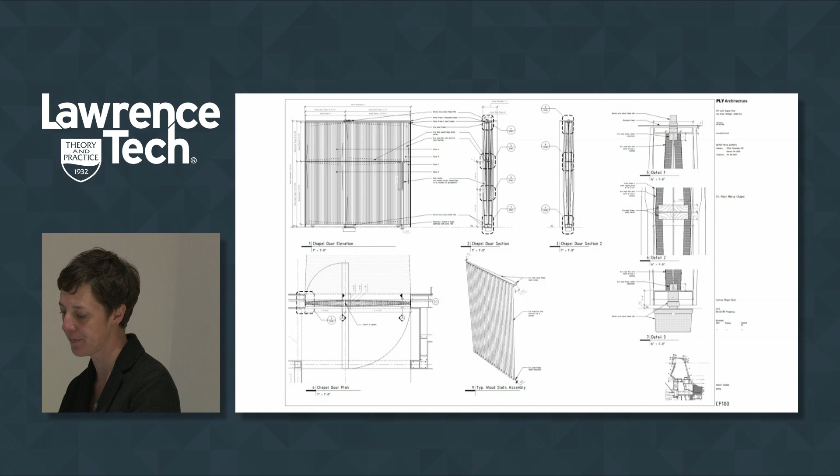Nope. Oh, nope. I'm going to try the video. This one's not working. Here we go.

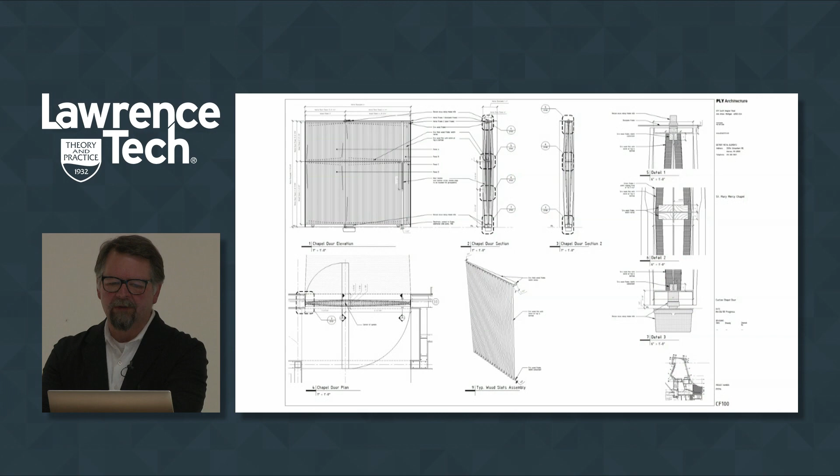And then you're probably getting tired. The last thing we wanted to talk about was actually the door that's in motion right now. And when I said there's a lot of gray hairs that came out of this project, this was one of them. This was something we always had in the design pretty much from day one, this idea of a grand door. And Father Gilbert, who was the liturgical space consultant for the hospital, every meeting we talked about the door, referencing the cast bronze doors at the LA Cathedral in Moneo's project.

So we immediately looked those up. They were $3 million when it was done, just for the doors. And we're like, yeah, probably not doing bronze. The doors were the same budget we had for this whole project.

So we went through a number of iterations and had some struggles, both with getting a fabricator willing to take it on for anything reasonable. And there was even a moment when we had explored, we'd talked to Cora about carving the door out of the stone, but trying to use a different stone to try to get it thin enough where we might get some light through it.

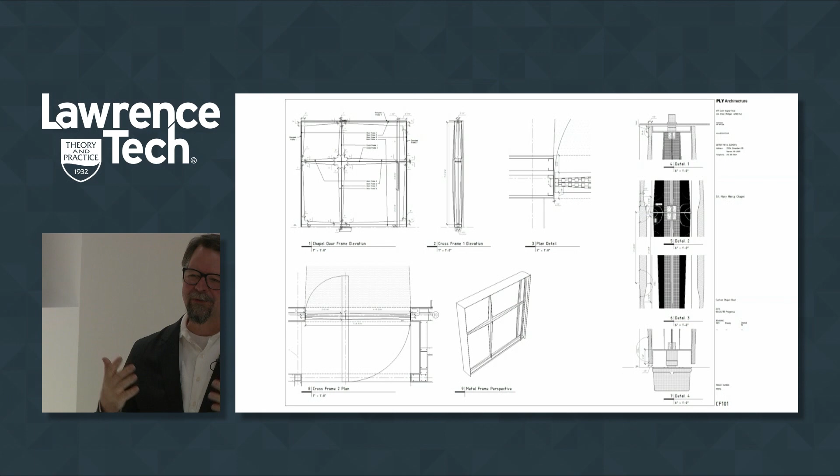And it set off an unbelievable flurry of emails from Lincoln and the guys at CoAD who were like, this is a research project, we could do this. They were sending us historic doors, stone doors, giant pivot stone hinges. We were so into it, and they were like, yeah, I'm pretty sure we could do it for your budget. We presented it to the design meeting, and they were like, a stone door? You mean like a mausoleum? And the air in the room just went... so, but we like our door.

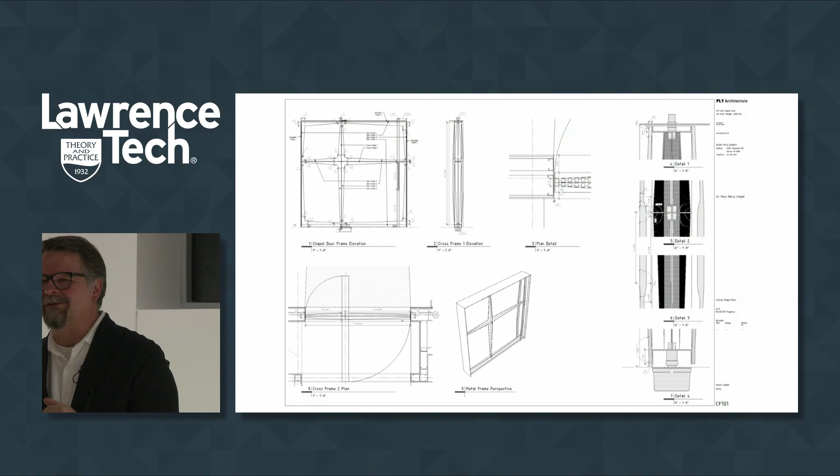The stone is another project that we're still going to try to work on. But the door, we worked with a couple who are graduates of your program and graduates of our program, Synechdoche Design, Adam Smith and Lisa Sauvé, and they did the fabrication for us. A couple of hiccups in this whole process.

So interior swinging doors to meet ADA accessibility need to operate with no more than 5 pounds of force. We had found the hinge manufacturer who decided they couldn't guarantee it was going to move for that force, given the weight of the door and the strange design, which they couldn't quite calibrate. We went around and around and around, and then finally found a loophole.

It's a rotating door, not a standard pivoting interior or swinging interior door. It doesn't have... it has a closer built into the hinge. And I forgot what the other loophole was, but we got Randy Abramson at the city of Livonia, and he's like, no problem. It's no problem. But it is the exit door for the chapel, it's one of the two. It swings, right? Like, yes, it does. He approved it, so we moved forward.

What you'll notice now is you can probably operate that door by just blowing on it. It is so soft in terms of its movement. But the number of nights of sweat dealing with this company in the Netherlands who decided they didn't want to return our calls to tell us the weight of the door or what we could do to reduce its weight to get the action to work.

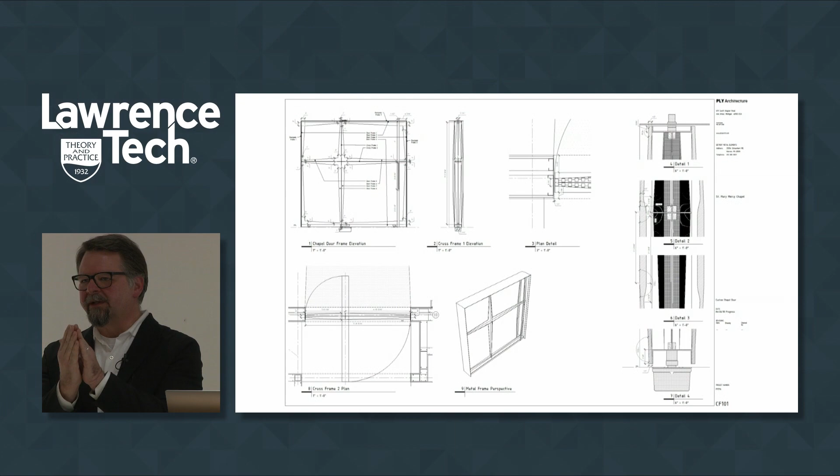We also wanted a really nice handle, so the leather wrap on the steel that goes up and down is important. The other thing we wanted was, as the door moves, to produce a dynamism of effect. So the slats actually get thicker as they get to the horizontal member of the embedded cross, and as they move, the gap of light in between starts to shift and change. There's a kind of moire that starts to emerge in the movement of the door.

The closing slide, which I'll leave up, is just another reminder and nod to all the people who worked really hard on this project, and were part of this broader team - not just Ply Plus, but liturgical space support, structures and engineers, and all the way through. So we'll leave that up so you can see the list of companies and individuals who came together to help make this happen. Thank you very much.

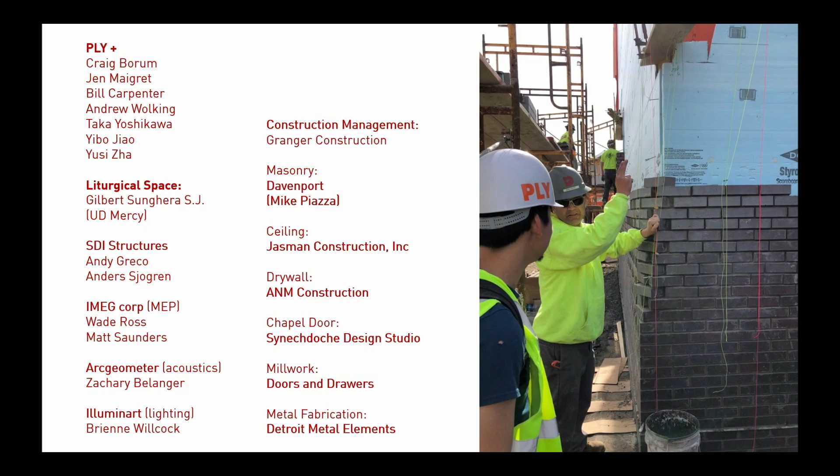The one thing Craig neglected to acknowledge with the door is that it was mostly fabricated by the time we realized the hinge went out. Oh, that's true, it's true. So we thought it was going to be the garage door for a while. That is true, it was pretty much done. I'm sure there's many other things you could correct in there. It's important to note, though, that that door was pretty much built sitting in the shop.

Any questions? Or we can do questions on the round as well. Anybody else? I'll look first, you didn't speak about that.

I guess this is the east-facing window. I was wondering the strategy behind that - we talked a lot about the south-facing one. You might be able to see it tonight. The east facing was a way to bring in light for the early morning mass, because that's the only moment that has a very specific schedule and timing to it. In some ways, this is really the window for all the chapel attendees who've been coming here for years. I don't know that the color shows very darkly, but the ceiling of it is painted a very light blue as a Marian color, because it also had significance related to the direction and Marian imagery. So it's got a bit of the cool tones of the morning, and it picks up the Mary part of St. Mary's Chapel as well.